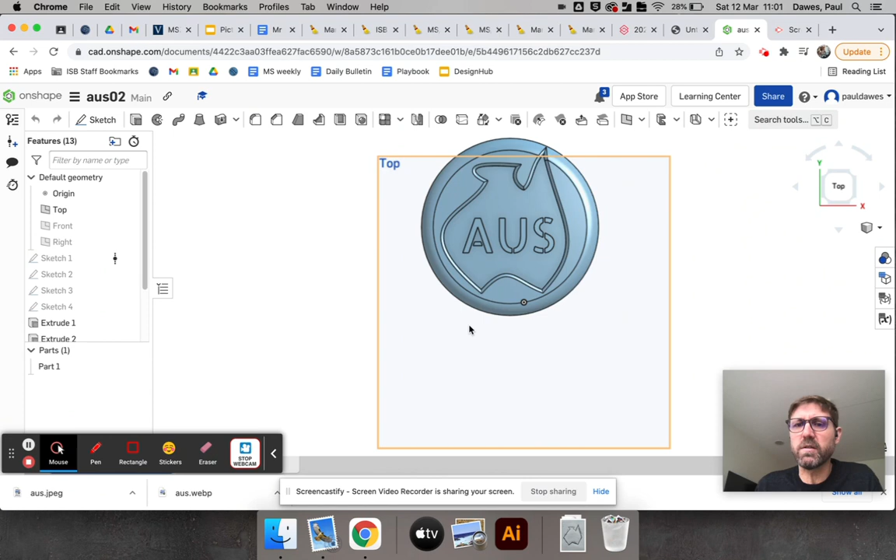So in the end, the document we're going to create is going to look something like this. You can see I'll look at it from the top. I've created a map of Australia that I sketched out. I've got the AUS for Australia, I've got the circle, I've got the fillets and all sorts of stuff. So that's what we'll end up doing.

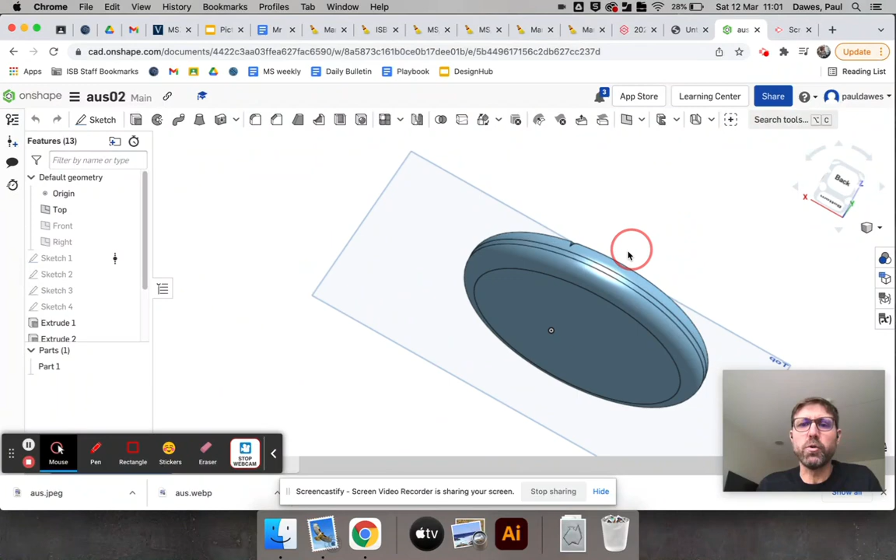Let me see whether I can click like that. You can see I've got a mouse now. With my mouse it's really easy to zoom in and out. It's also easy when I hold down the scroll button to pan - this is called panning. And when I use my right-hand mouse button, I can orbit around. It gets you really confused really quickly, but if you go back to one of these things here, you can pretty quickly get back to where you started from.

So what we'll do is we're going to go to Onshape. I'm going to first import the sketch. So as you saw that sketch I showed you in my book, I just took a screenshot of it, airdropped it to my downloads, so it's there in my downloads. So what I need to do is bring it into Onshape. I've already done it, but I'll show you how.

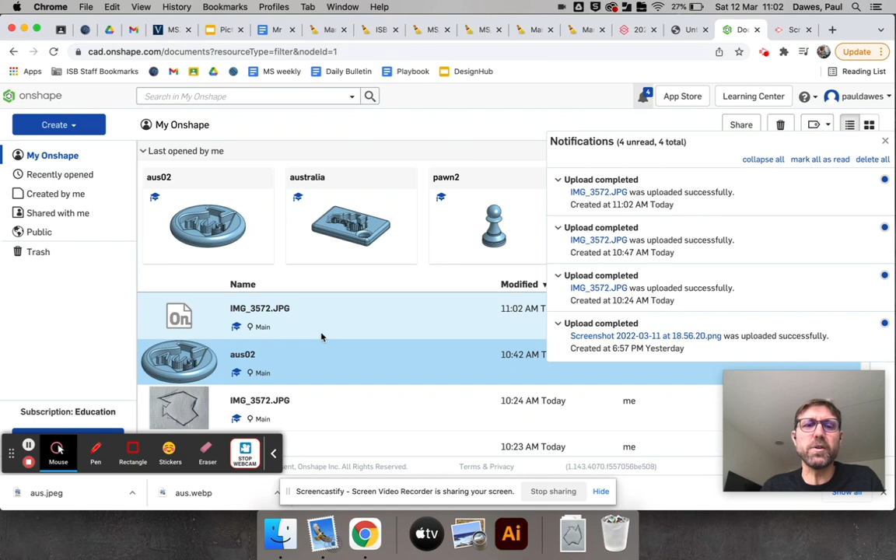So I go to create, import a file, and import it from my downloads. There it is. I'd probably name it nicely - you know how much I like naming things correctly. And it's going to upload it and put it in here. Okay, it's a bit slow and a bit clunky. I'm not particularly totally pleased with Onshape and everything it does, but you can see that it's there.

Okay, it's going to take a while to actually show the thumbnail. In actual fact, I'm going to delete this one - I'll send that to trash because that's the one I'll use, it's exactly the same one. Okay, so I'm going to create a document.

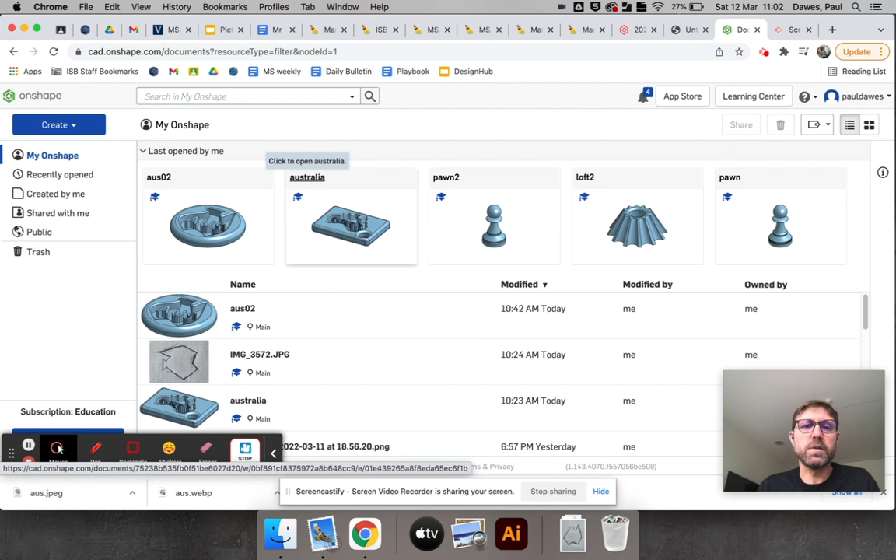I'm going to call it AUS3, and I'm going to start by creating a sketch on the top plane. So sketch on the top plane, and I'll turn off the front and the right. Actually, I'll turn off the top as well, so I can just see that. I'll put that like that. Ooh, that looks good. Now I'm looking at it directly from above.

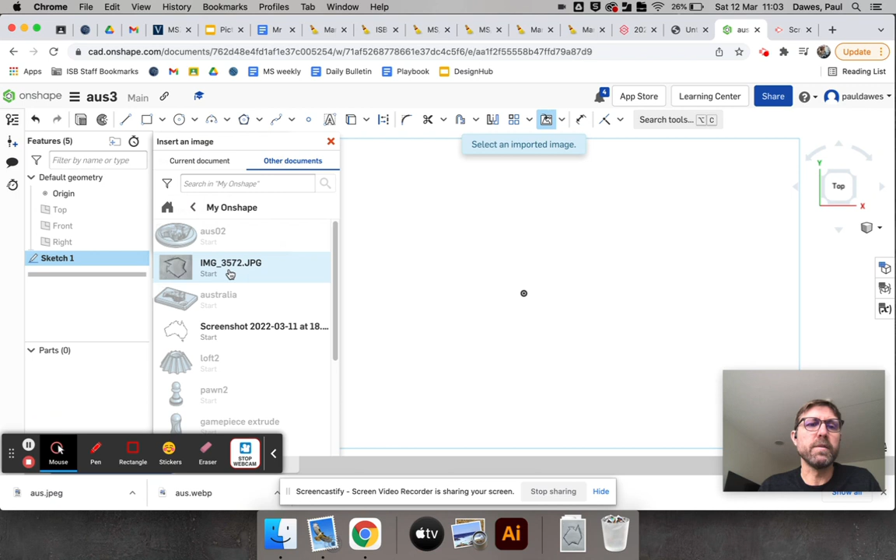So I'm in Sketch 1, the first thing I'm going to do is insert an image. And it says in the current document there are no image files available, but if I go to other documents in my Onshape, yeah, I've got that image there. So it's that image there, and I should be able to click and drag it.

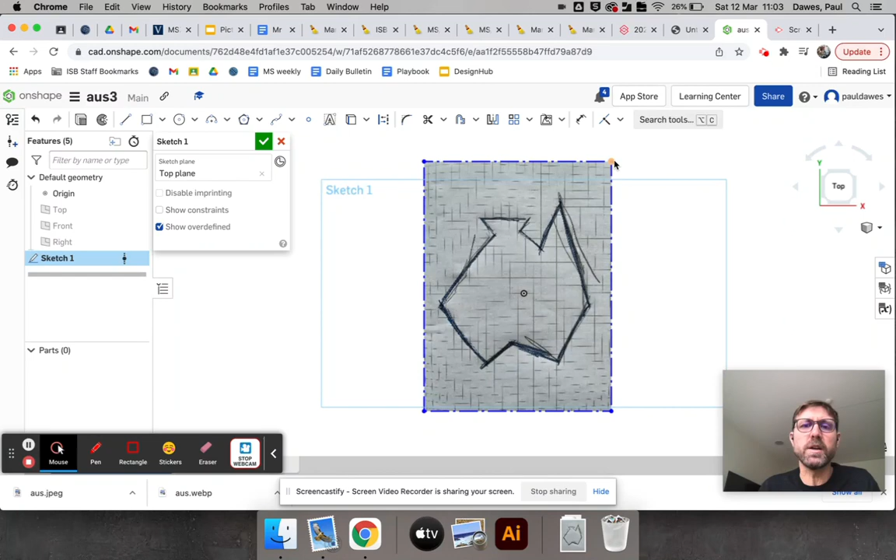It takes a while, it's kind of clunky. I'm just going to click it and drag it, and put it there. I'm not going to bother too much about it being perfectly in the right size or shape or anything like that - I can worry about that later on. Really, what you're looking at here is working out how to use all the different tools. Okay, so that's it, that's the first sketch.

Now I could rename this, and I'm going to call this my hand sketch. And then I'm going to do a new sketch.

Yep, and on which plane? I'm going to do it on the top plane there. Yep, and then I can get started sketching.

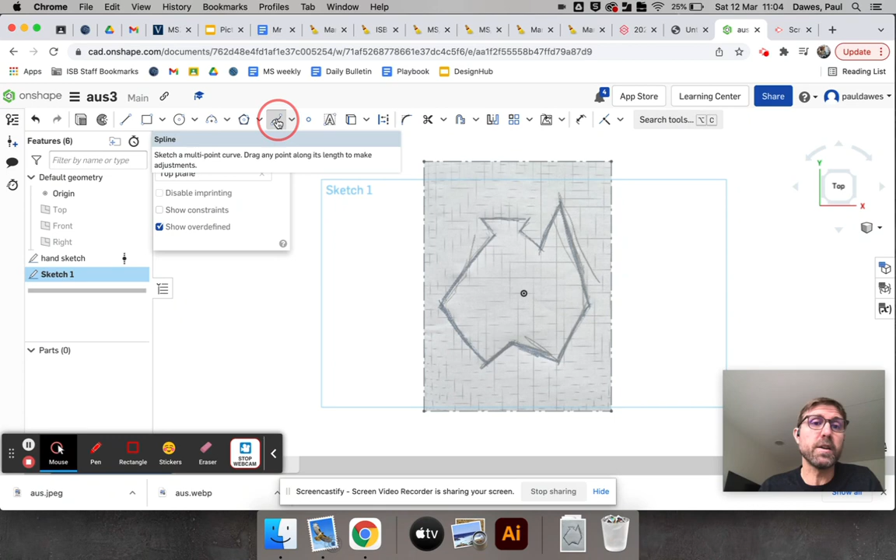Now I'm going to sketch using a thing called a spline, rather than straight lines and circles and squares and things. You've probably seen it in other programs as well. So all I'm going to do is zoom in.

I'm just going to start clicking and following this line around. It's a bit unpredictable in the way that it does its curves, and I'm not particularly happy with it, but there's not a lot of choice. I've done a bit of googling to try and find out whether there's something better, but it doesn't seem to have anything much better than this.

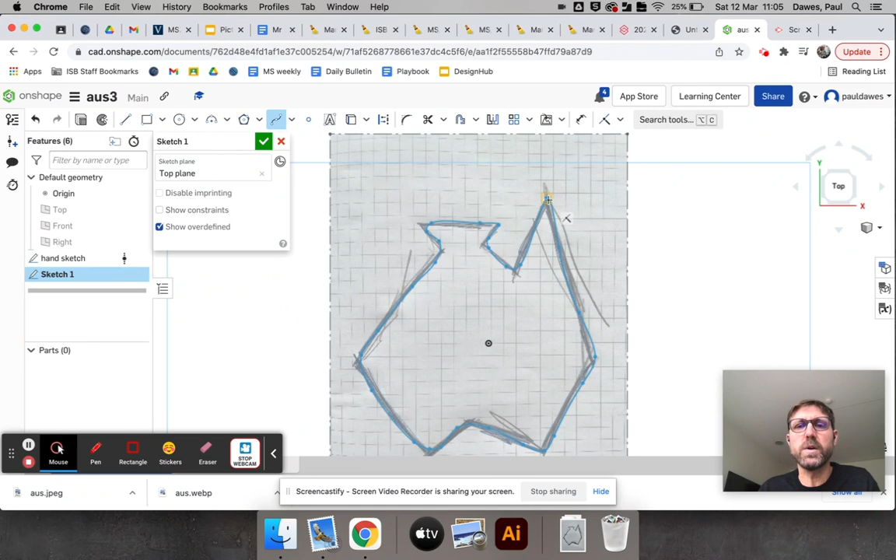So I'm just going to kind of roughly go around here until I'm happy with it. It will automatically come to the top and show me this little yellow square and say, is that where you want to go? And I say, yeah, that's good. Okay, so that's it finished.

I'm going to turn the hand sketch off, so I've just got that. And you can see it doesn't look too bad. I can grab each of these handles.

Oh no, I can't, I'm going to undo. I have to hit escape. I'll turn the hand sketch off, go to that sketch number 1, and yep, I'm editing that sketch.

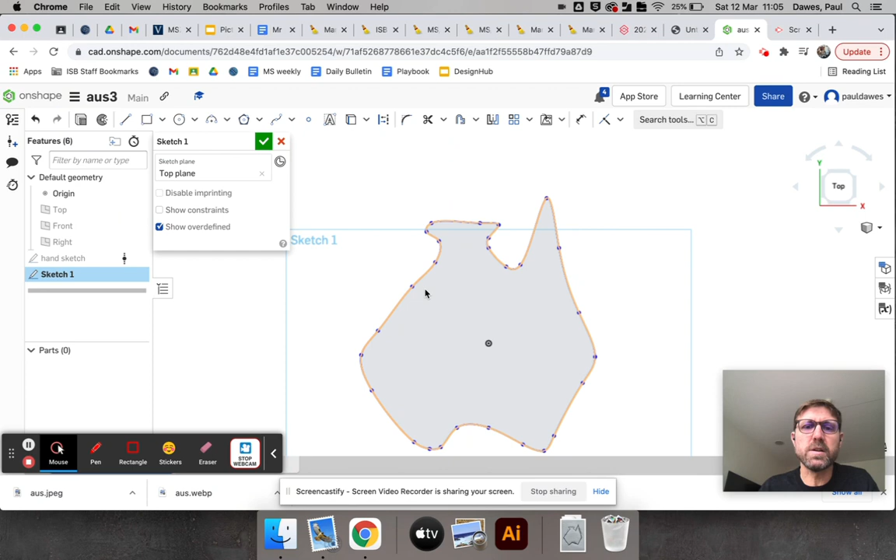So I should be able to grab each of those and start playing around with them to get them right. If I'm not completely happy with that, I can move that down, I can move that around. I could even add some spline points, so I can have a little bit more control in the way that I move the shapes around.

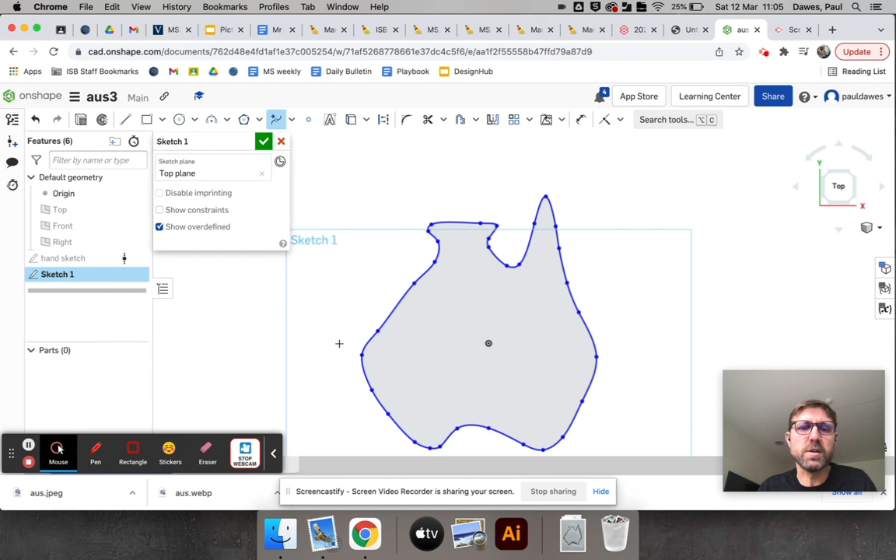So I can do that. Then I hit escape, so I'm no longer playing with the spline points. Now I can move things around and have a little bit more control.

I'm happy with that, that's fine, I don't care too much about that. And that's okay, so I'm going to call that - I'm not going to bother renaming that, let's just call that sketch number 1. So that's done.

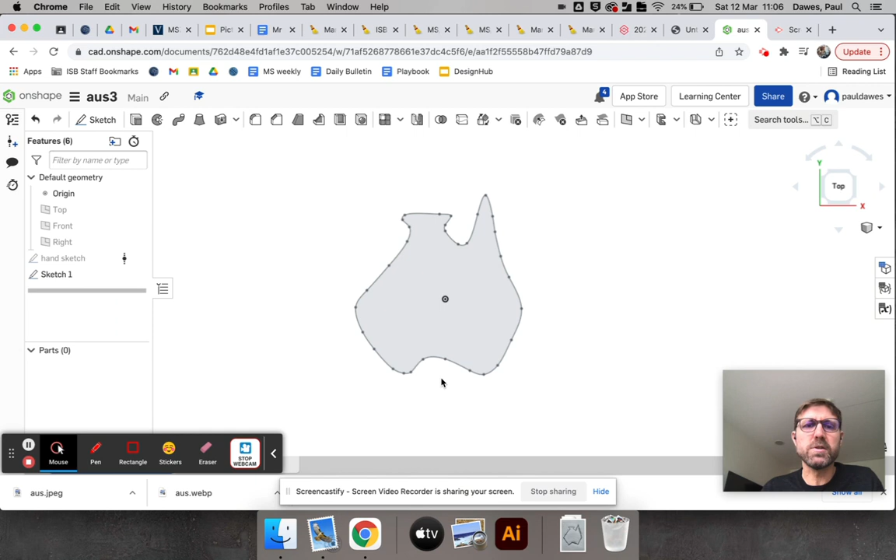The next thing I'm going to do is draw a circle around it, put some text on it, and maybe put a hole in it as well so I can put a keyring on it too. So another sketch - I might just rename this. I'll rename this aus.

And then do another sketch. I'm going to do the sketch on the top plane again, and I'm going to do, because this might be interesting, a 3-point circle. So I reckon I want the circle to go from there to about there, and then where do I want it? About there.

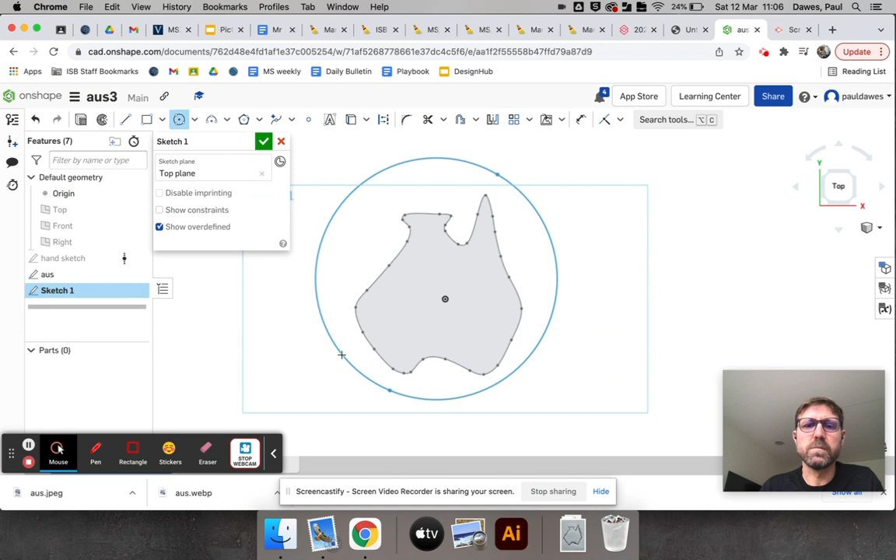I haven't got any dimensions and I'm just going to leave it like that, that's fine. So that's my circle. I might even - you don't have to rename everything, but it does make it easier when you need to make some changes.

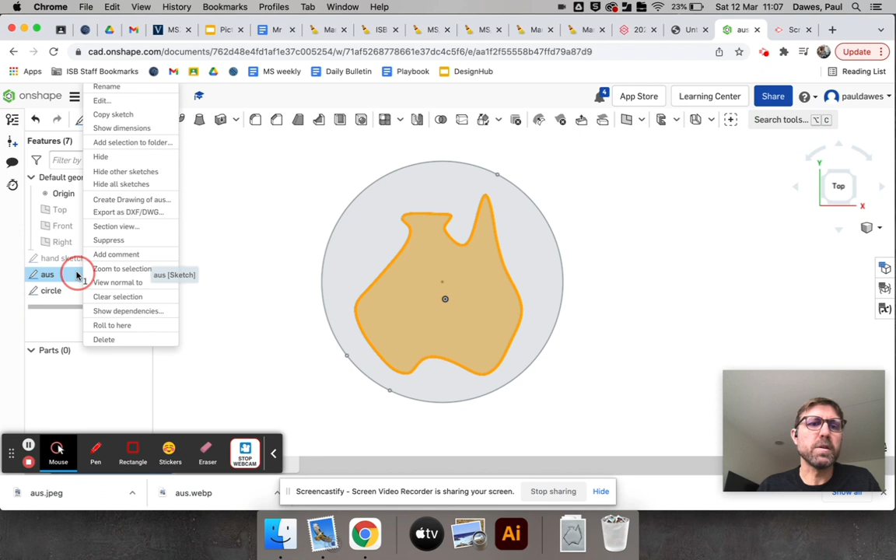And I might actually - can I move that circle around? I don't think I can move that circle around. What I might be able to do is get aus, I might be able to edit aus. No, I can't. Yeah, the moving around thing, I don't seem to have much luck in that.

So my circle's there - sorry, turn the circle back on. I've got that. Now I'm going to do my last piece of sketching. Again, I'm going to do the sketching on the same plane, on there.

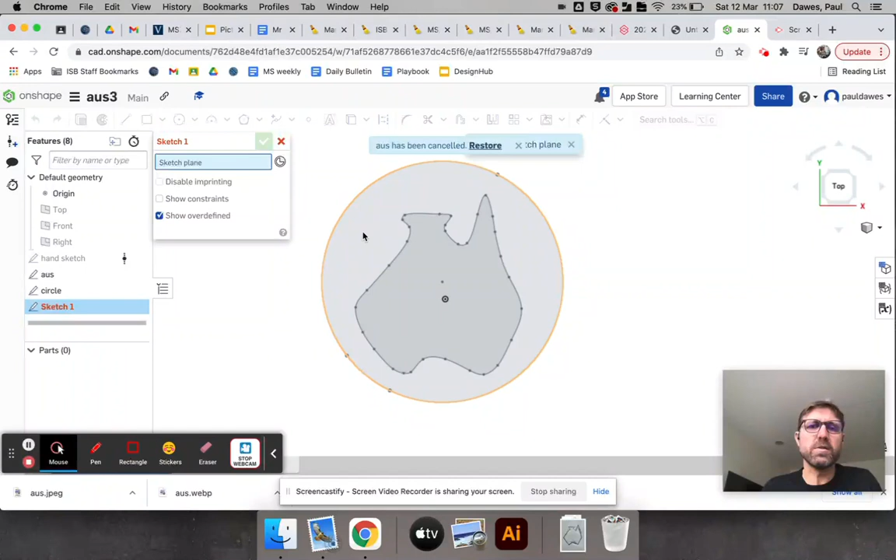And I'm going to put some text and put it kind of there, and it's just going to say AUS. I don't like any of the fonts that they have, I'm going to use this stencil one just because it's there.

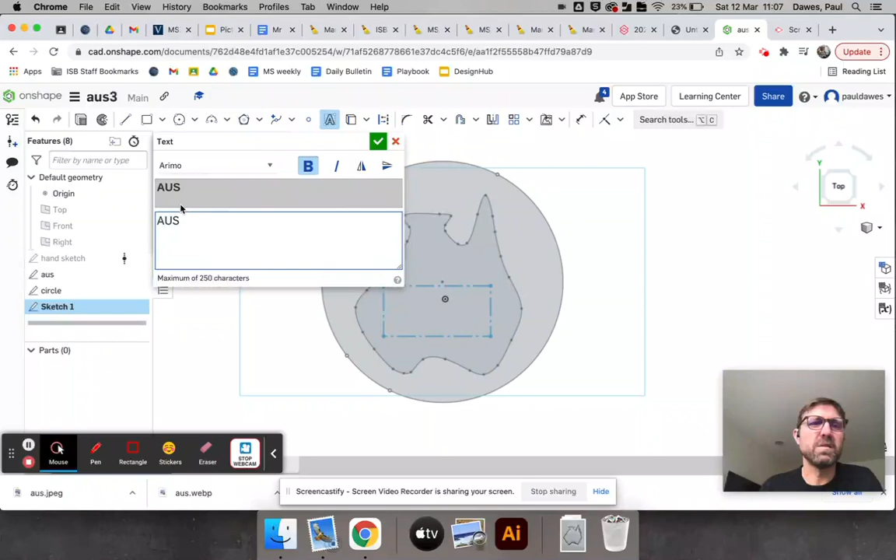Mind you, let's have a look at Arimo. Yeah, they're all rubbish. What if it's bold? Oh yeah, that'll look all right, just like that. So let's just go, yep, okay, whatever.

It's a bit too big. Can I move it so that it fits a bit better? Let's see, can I move it so it fits a bit better - but it doesn't.

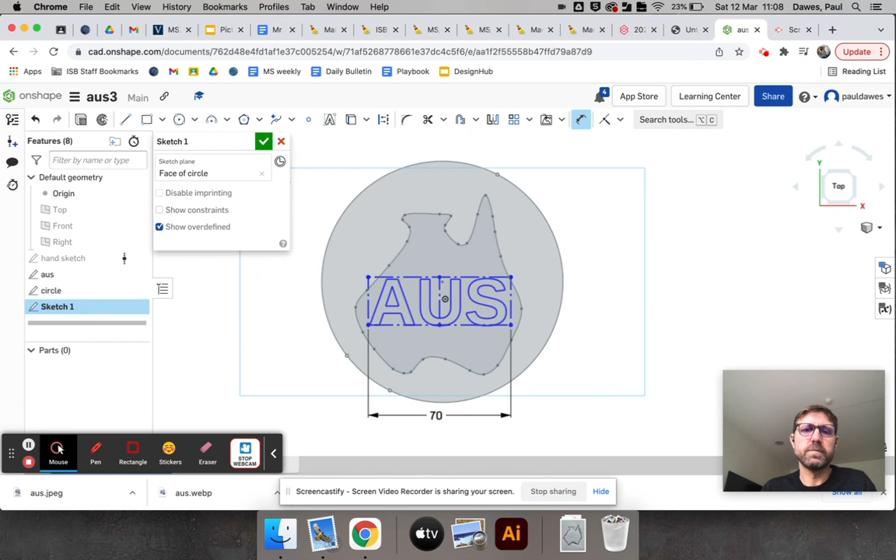That's all right. If I wanted to change it, I could go to dimensioning tools. I'm going to click and then click again. Let's make it 70, so it's not quite so big. Okay, good. I'm going to hit OK, and then I'm left with the circle, the map of Australia, and the AUS.

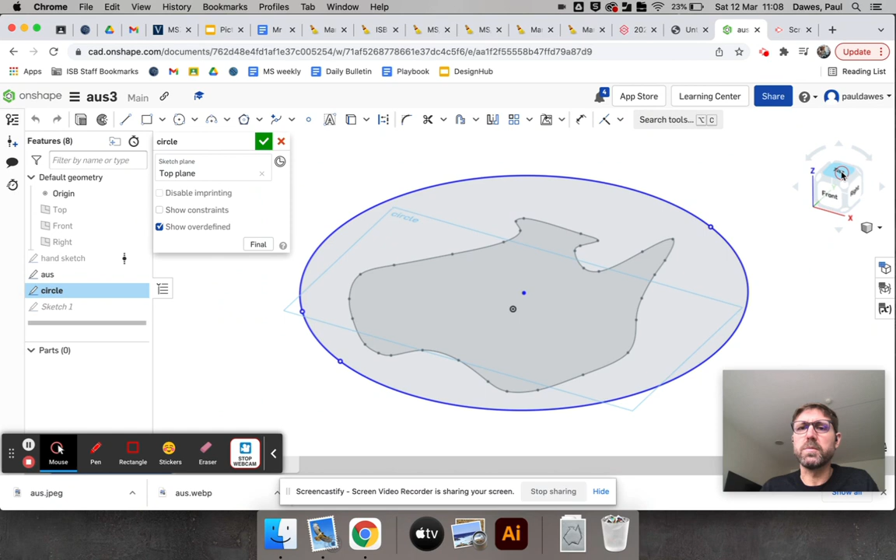I wanted to create a key tag thing as well, so I might just go to the circle and edit that sketch. Go up to the top again, and I'll just draw a...

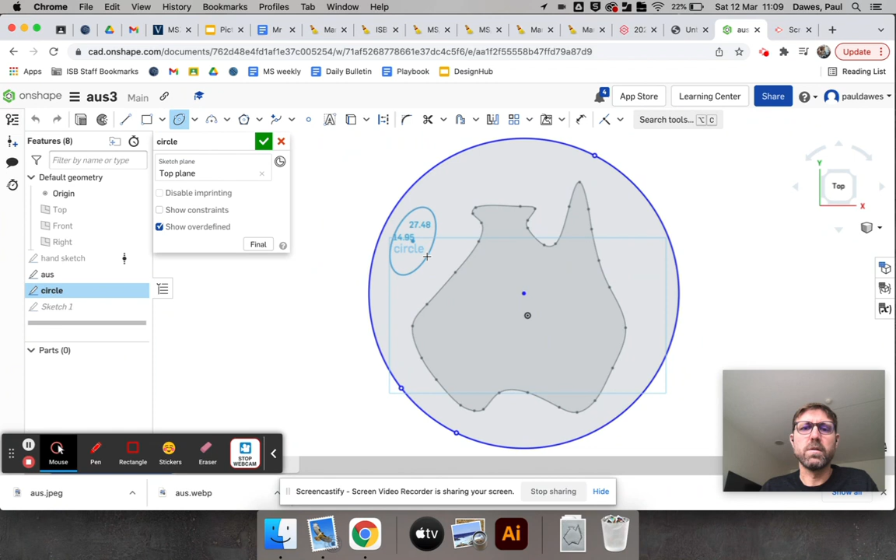I wonder what an ellipse is going to look like. Let's have a look at ellipse. Let's draw an ellipse kind of there. That could be cool, what do you think? So draw an ellipse kind of there and there. That could be fun, to have a little keyring with a longer ellipse kind of thing there. Hit OK, okay good.

No worries, I'll go to there. Oh sorry, I can never get the right corner. Which one? It's that corner there. Okay, the first thing I'm going to do, I'm going to make the circle.

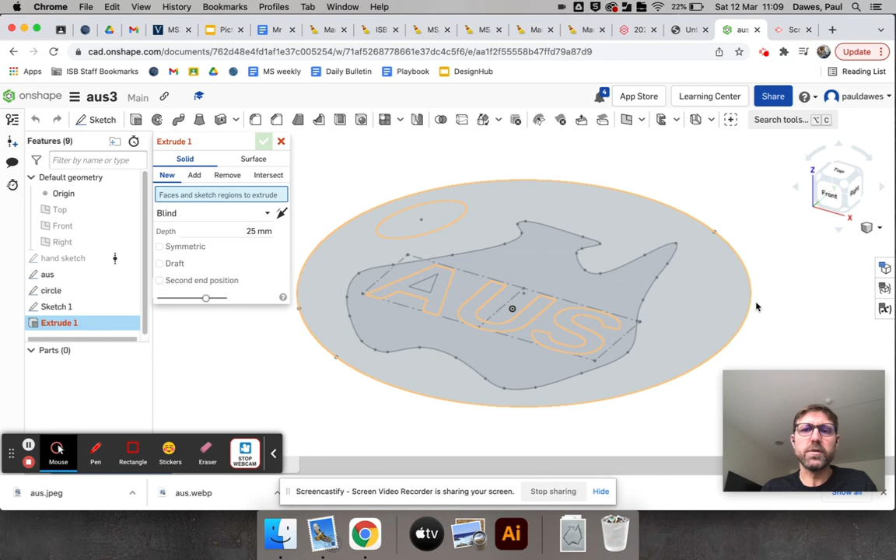I'm going to make that go down, and I'm going to make it 14 millimeters thick. And you can see if I look, the hole's already there, so it's already kept that hole there.

That's good, and then I'm going to hit OK, and then I'm going to extrude that map. I'm going to extrude that down and have it remove. The other one was 14 millimeters, so let's make that 10 millimeters deep, and hit OK.

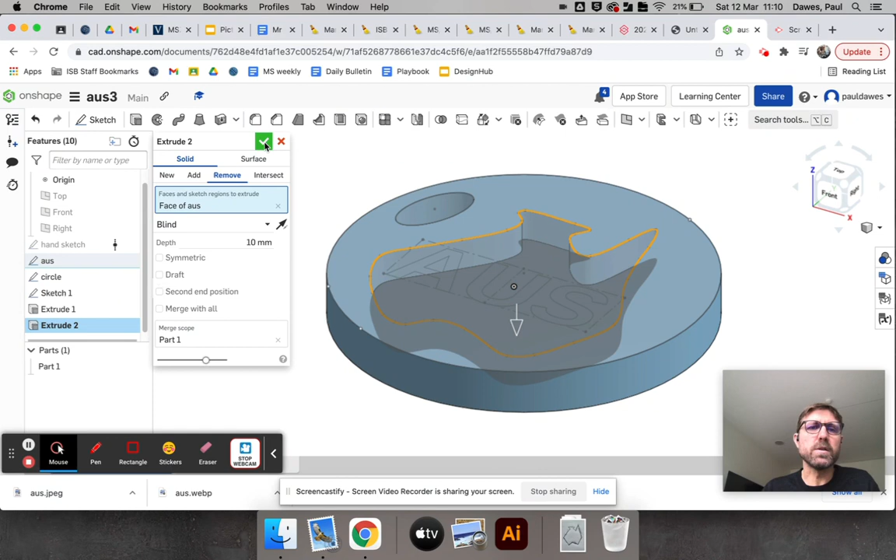So that looks good, yeah. And then, so you can see it looks kind of like that. And then the last thing I need to do is my Australia. So what I'm going to do is extrude that, have it go down, and have it not blind - I'm going to have it up to the next, so it goes down to the next face, and hit OK.

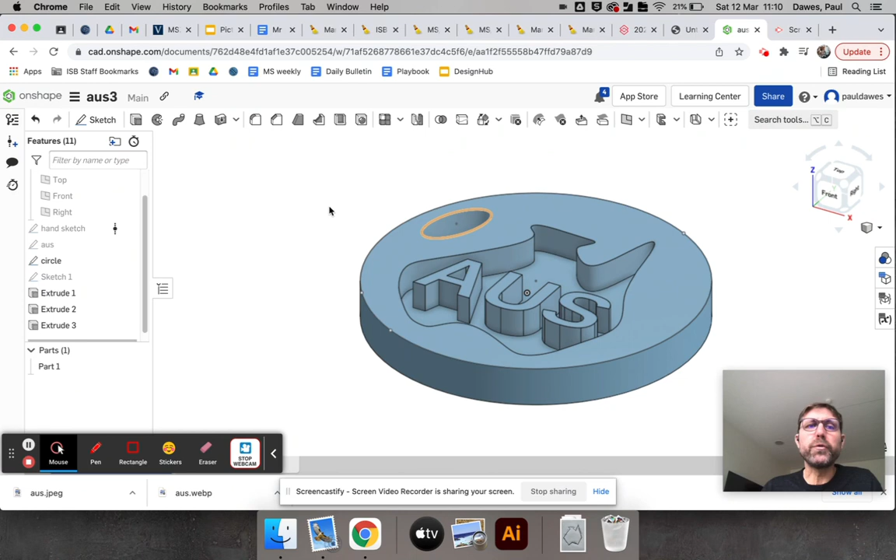And then I'm left with that. Yeah, that looks all right, doesn't it? Filleting, yeah, is that where I was going to go to next? So importing a sketch, splines, we did some shapes, we did some text, we've extruded it, now we're going to do some filleting. You can faff around with filleting as much as you like.

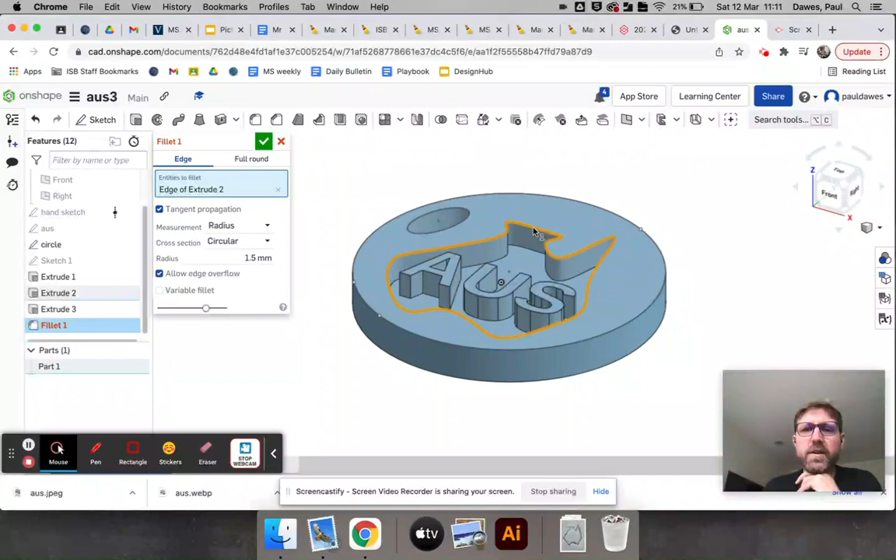Depending on how detailed your shape is, sometimes you really struggle to get a good fillet. So I'm going to try that Australia one first and see whether I can get a fillet on that. It actually works with 1.5 millimeters, but if I try 3 millimeters, that works too. I wonder whether I can do this side as well - oh look, I can fillet both, so I'll do that.

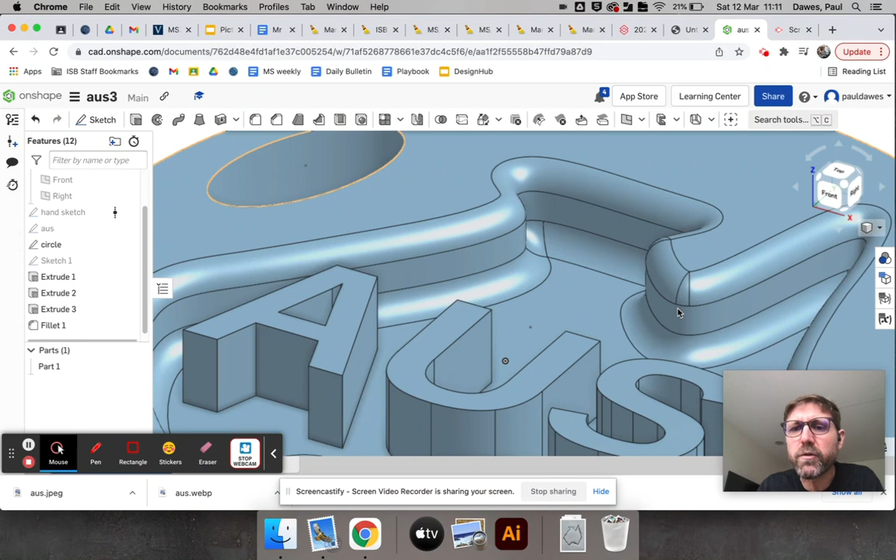Before when I was playing, it didn't work and it was looking really bad, but that looks quite good with that fillet there. I'm going to struggle to fillet anything like that - if I can fillet it even 1 millimeter, I'd be lucky. Can I fillet at 1 millimeter? No... oh yeah, it does.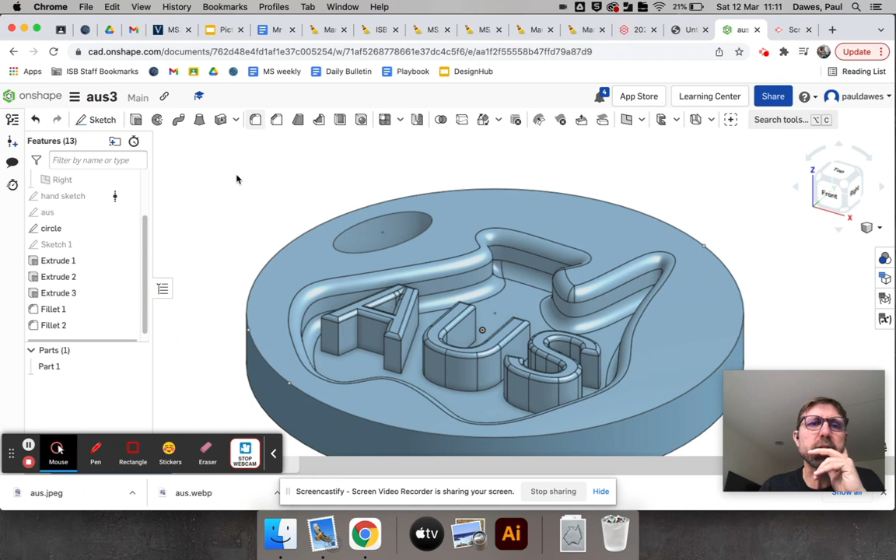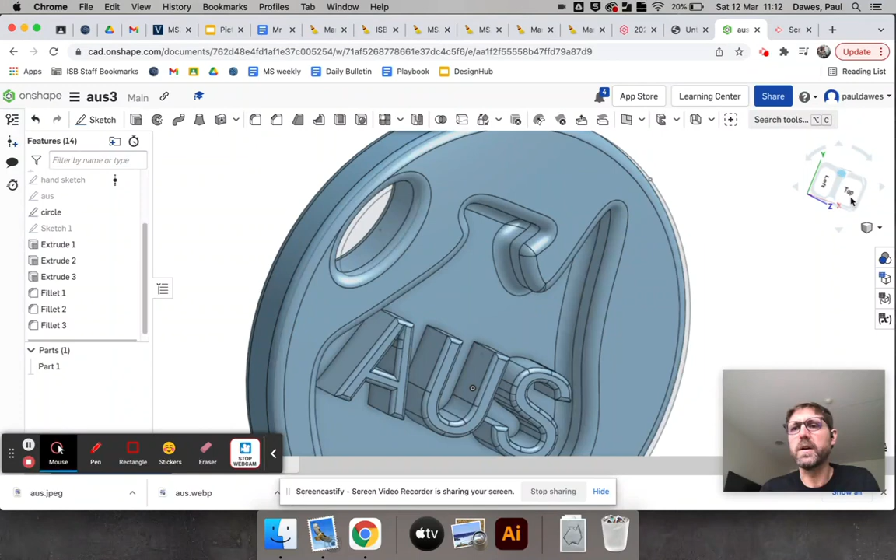Okay good, and then obviously I could fillet the bottom as well. I'm not going to bother, but I could fillet that. I clearly would like to fillet that, and I'm going to fillet that and that as well. I wonder how much I can do - can I do 3 millimeters? Let's see what 3 millimeters does. If I go too far, what's going to end up happening is I'll end up with a hole there, but you can see that's kind of my finished product.

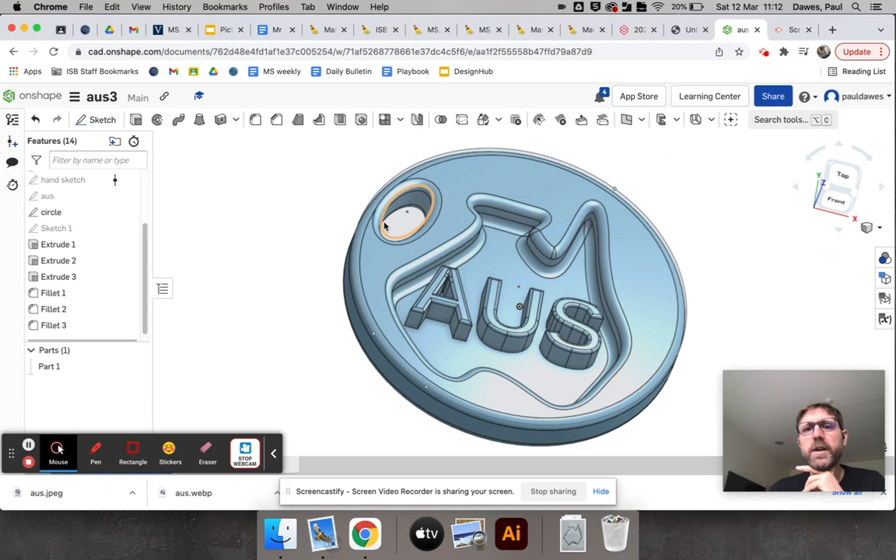So I'll show you around it. That's me creating a very simple keyring using a sketch that I've imported myself. I've used text, I've used a shape that I've imported myself, and I've used some regular shapes. I reckon you could do something like that pretty easily - use your imagination, see what you can do.